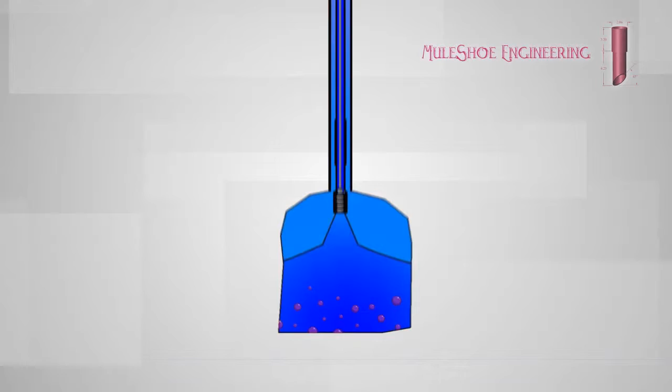The oil and gas industry understands separating water out of a mostly gaseous stream. But we are less comfortable with the flip side of that coin, separating gas out of a mostly liquid stream. This separation task relies on different fluid forces and requires different pressures and internal configurations than traditional separators.

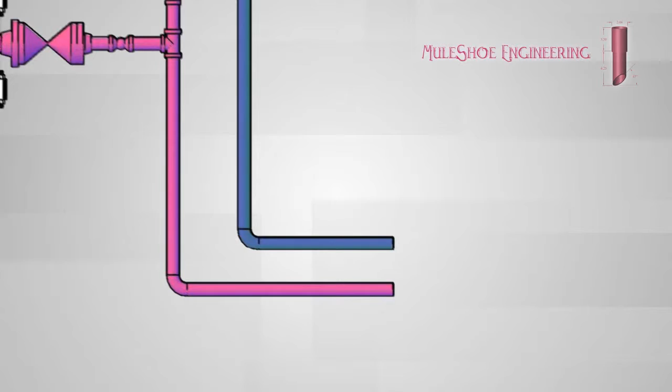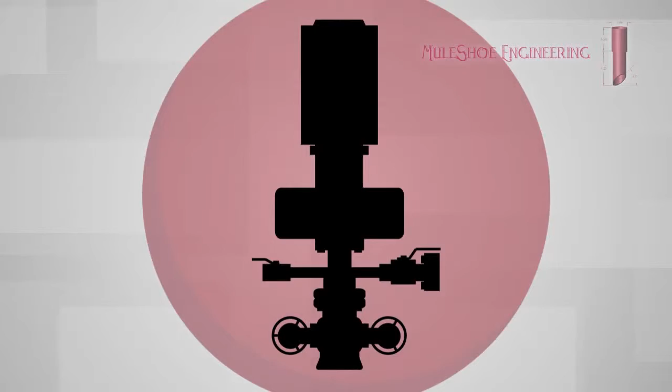The patented Gas Buster from Muleshoe Engineering is able to facilitate these non-traditional conditions, and it has an internal configuration designed for removing gas from liquid. Muleshoe Engineering was founded with the goal of applying field engineering and operational concepts to field engineering problems. The Gas Buster is one of these field concepts.

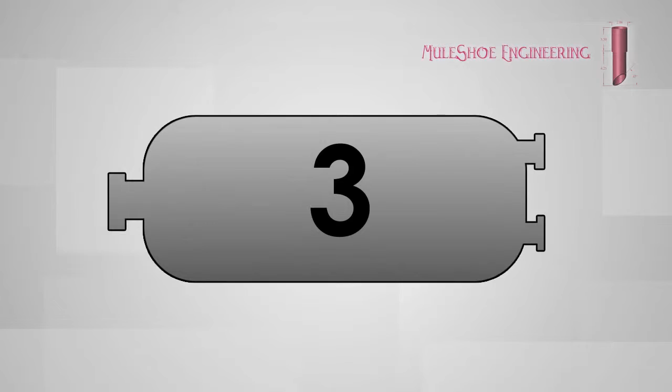In many onshore gas wells with downhole pumps, the velocity in the annulus is too slow for the gas to drag liquids along with it, and the gas that flows into the separator is essentially dry. We've observed that when we combine a nearly gas-free liquid stream with a nearly liquid-free gas stream in a separator for a few seconds, we end up adding water to the gas stream and adding gas to the liquid stream.

Rather than combining two single-phase streams, many operators pump directly into a tank or water gathering system. There is always some amount of gas entrained in the pumped water, so this gas will eventually be vented into the atmosphere, eliminating the opportunity to sell it while risking fines for emitting so-called greenhouse gases.

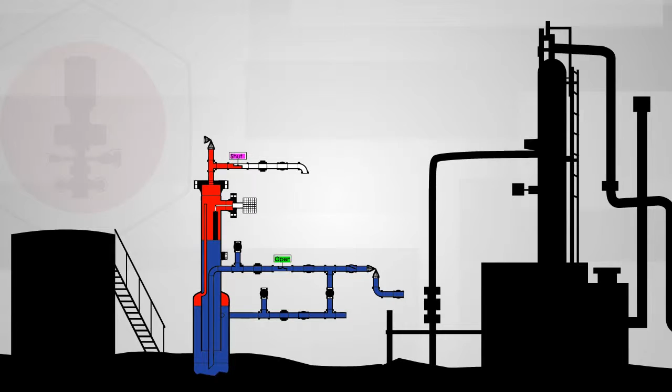The Gas Buster addresses both the short duration for separation in a traditional separator and pumped gas by utilizing excess horsepower from downhole pumps to transfer water without the need for surface pumps and tanks. It is also able to capture pumped gas without added compression.

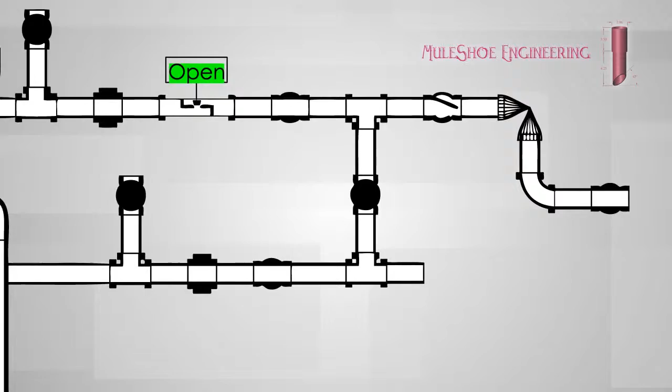Under normal operations, the gas outlet stays shut while the water outlet remains open. As pumped well fluids enter through the inlet pipe, the internal piping configuration separates the pumped gas and distributes the separated fluids, transporting the gas to the top of the vessel through a standpipe.

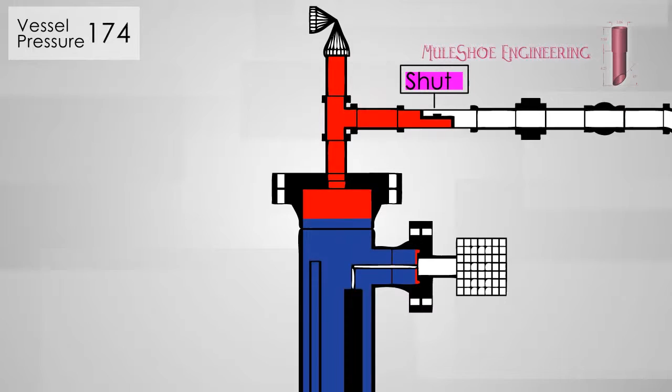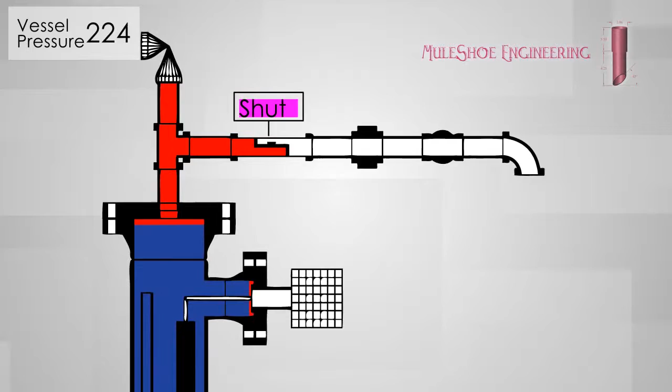A float triggers the opening of the gas outlet once enough gas has accumulated. A back pressure valve ensures that the unit is at a higher pressure than the sink. This elevated pressure pushes the gas into the gas sales line.

As the downhole pump forces more liquid into the system, the float begins to float again, and the gas outlet shuts. Fluid flowing back into the vessel compresses the residual gas at the top, raising the pressure to the point of opening the water check valve and allowing the water to flow into the water system.

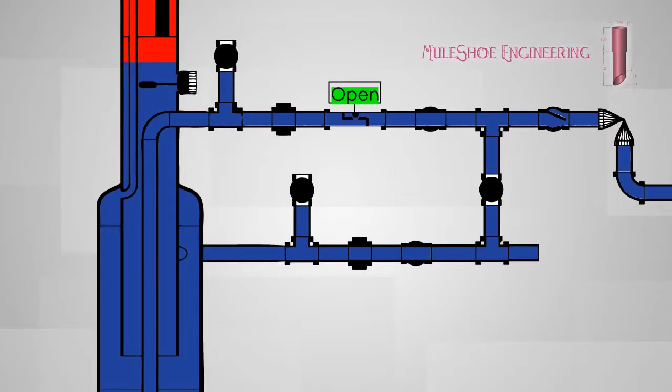A bottom float is also in place to automatically close the water outlet in the event that a large quantity of gas is slugged through the downhole pump.

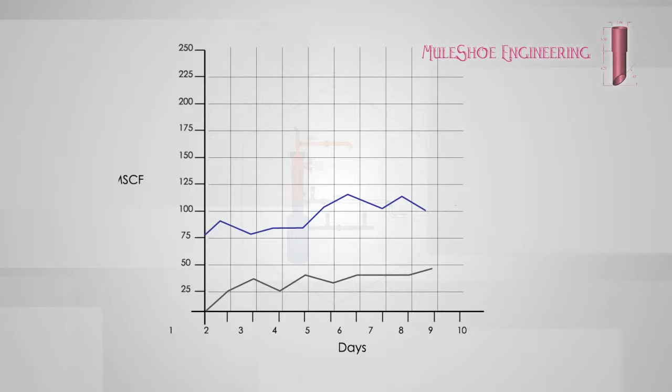With the Gas Buster, you'll see increases in your sales volumes, while outgassing from tanks is reduced. Every well is different, but we've been able to quantify pumped gas collected on a number of wells that averaged 50 MSCF per day, with one well showing 245 MSCF per day of pumped gas. A $150 to $1,000 per day increase in gas sales can pay off this equipment very quickly.